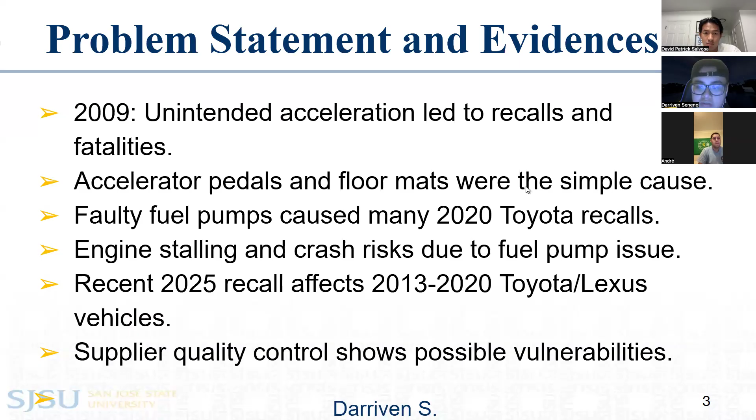As for some TQM tools that we will be using, we're going to use the Pareto chart, benchmarking, QFD, the cause and effect diagram, and control charts.

After we conduct our Pareto analysis, the most critical issue is power window switch fires, which impacts 47.3%, or 4 million vehicles, and poses a significant fire risk.

Battery tray issues affect 23.7%, or 2 million RAV4 models, and those can cause electrical shorts. Fuel pump defects impact 21.3%, nearly 1.8 million vehicles, leading to engine stalling.

Toyota should prioritize a complete redesign for power window switches, use more durable materials for battery trays, and tighten fuel pump supplier controls with increased testing.

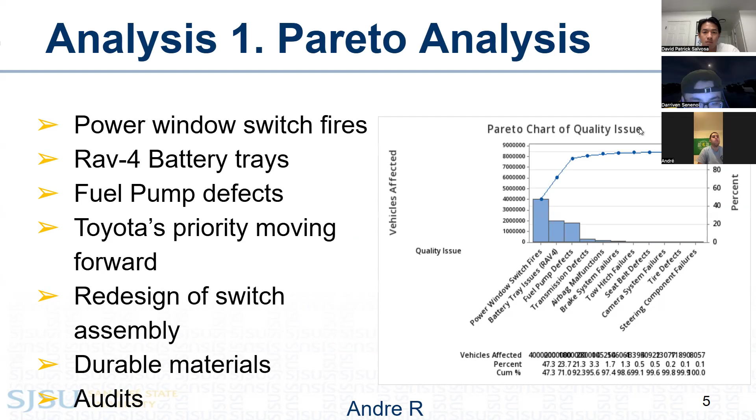Comprehensive supplier audits and rigorous in-house testing are needed for airbags and brakes, and addressing these main issues is crucial for safety and quality.

Toyota utilizes benchmarking to address recent quality concerns highlighted by a 2024 certification scandal. Process benchmarking against Honda aims to strengthen testing and reduce over-reliance on automation, reinforcing their lean principles.

Financial benchmarking against Tesla seeks to identify hidden quality costs and improve supplier oversight despite record 2025 revenues. Performance benchmarking against Lexus targets improved customer satisfaction and in-car tech reliability after a decline in the JD Power IQS.

Product benchmarking against Subaru focuses on enhancing durability and reducing recalls related to issues like power window switches and transmission failures, by analyzing competitor strategies and strengthening testing.

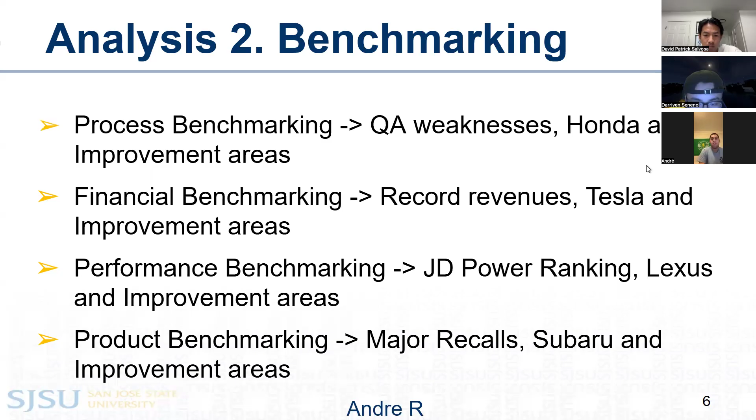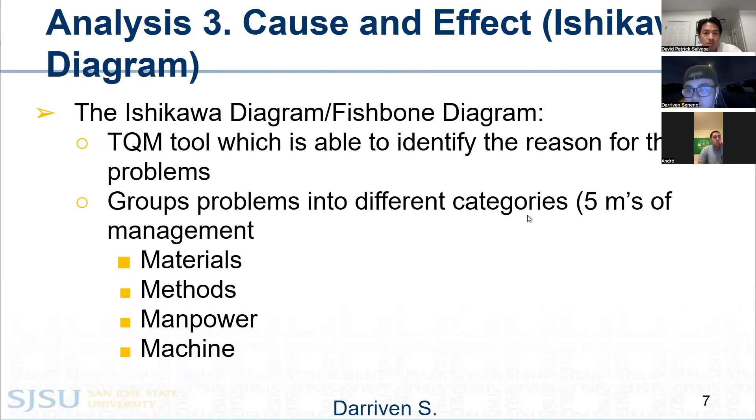Another TQM tool we used was the cause and effect, or Ishikawa diagram, also known as the fishbone diagram. This is used to organize potential root causes of these issues. This tool also helps us identify what might be contributing to the defects and groups them into four key categories: materials, methods, manpower, and machines, which are part of the five M's of management in lean manufacturing.

Our fishbone diagram has four main causes: manpower, machine, method, and materials, with short sub-causes included. For manpower, we have inadequate response times, leadership communications, training, and supply monitoring.

As for machines, we have outdated systems, inconsistent testing equipment, defective machinery parts, and error detection on automation. For methods, we have delayed recalls, risk checks, verification on fixes, poor communication, and no customer data in identifying issues.

As for our last cause, materials, it consists of supplier issues, low quality materials, part durability, and untested material consistencies. And these all lead to the quality problem of defective products, which results in recalls and crashes.

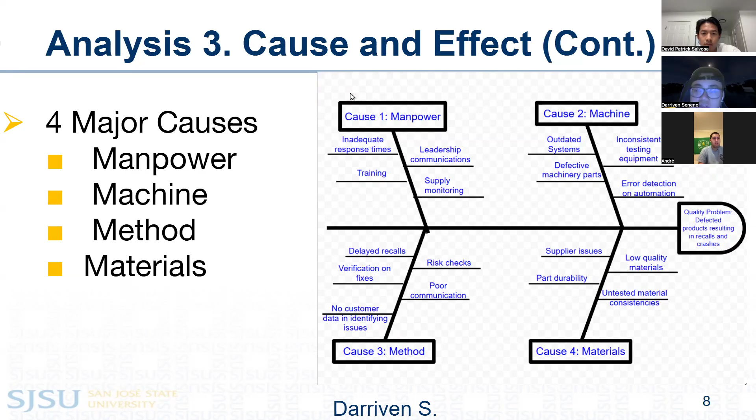For our control chart, we built a C chart to track how many Toyota fuel pump recalls happen each month in 2024. We pulled the raw numbers straight from the NHTSA's public recall database, put one month per row, and pasted the 12 counts into Minitab, because each month is the same opportunity. A C chart was the right tool.

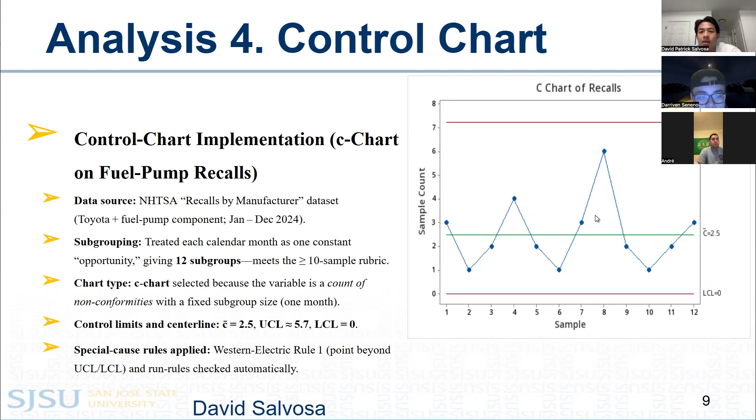Minitab calculated the average count at 2.5 and set the upper control limit at about 5.7.

Next slide. Eleven months sat safely inside those limits, but August showed 6 recalls and jumped over the line. That's a special cause signal. What that means is that the recall process is mostly stable, yet August tells us a supplier or quality assurance slip happened and needs a fix. Going forward, any new point above that limit will warn us long before a big recall snowballs.

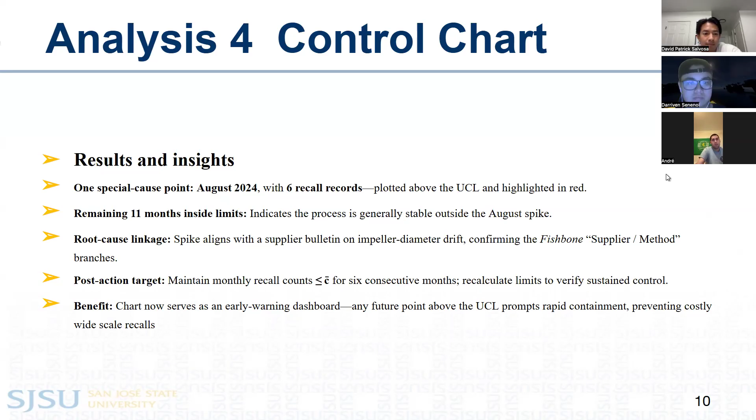I developed a QFD, a quality function deployment model, and I gathered data through a Qualtrics survey, which asked participants their most recent vehicle brand, ranging from Hyundai, Honda, Subaru, Ford, and an option for other car manufacturers. Then I had two questions with a scale rating of 1 to 5 on six key attributes: safety, reliability, recall notification, build quality, durability, and transparency.

These questions covered their own vehicles, and then what they would like in a vehicle they would purchase in the future. I also added an option for open-ended feedback on strengths and improvement areas for Toyota or any other companies.

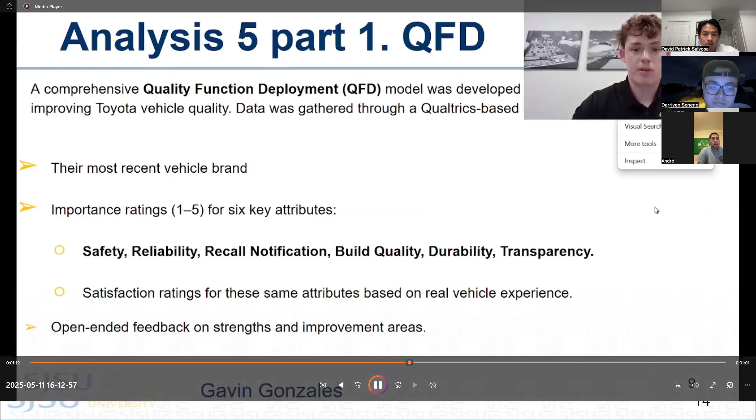The QFD outcomes we found were top customer priorities — obviously all the importance properties, functional requirements mapped. Technical areas like safety audit, supplier QC, automation, and assembly were evaluated for their impact on meeting customer needs.

We had competitive insights: Toyota actually performed well, but lagged in real-time recall and assembly automation compared to their number one competitor, Honda. Calculated priorities like safety audits and supplier QC had the highest absolute and relative weights, indicating key areas where investment will yield the most customer value.

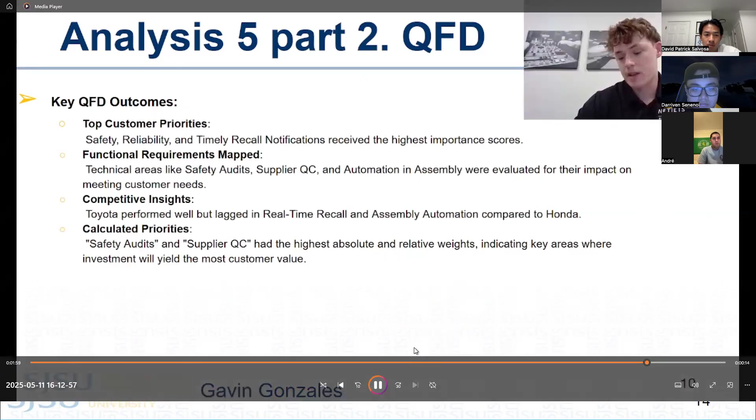And this is all displayed on the QFD that was developed over this research process.

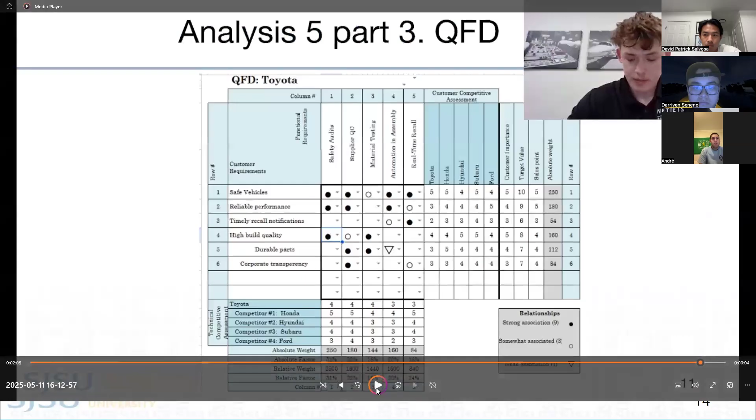For our action plans, our first action plan is the power window switch redesign. Our first action targets the window switch fires, the biggest slice of our Pareto chart. It's rated high feasibility because it's low risk, quick payback, and the changes are totally under Toyota's control.

Our second action plan is the fuel pump supplier capability upgrade. The C chart spike in August points straight at the fuel pump supplier. Most of the costs sit with the supplier, and Toyota's contract lets it charge back for defects, so the supplier has an incentive to cooperate.

Success is simple: keep monthly recalls under the 2.5 average for 6 months straight. The mix of quick containment and shared costs makes the plan very doable, so it's high to moderate feasibility, mainly depending on supplier follow-through.

Our third action plan tackles battery tray failures, the second biggest issue. We'll switch the stamped steel tray to a glass-filled polypropylene composite. Composite trays are already used by competitors, so the tech is proven, but we'll need new tooling and crash tests.

Costs even out because the composite resists corrosion and cuts future warranty claims, though it needs more tooling, cross-team coordination, and time. We grade this one as moderate feasibility, but the expected 75% cut in warranty claims justifies the effort.

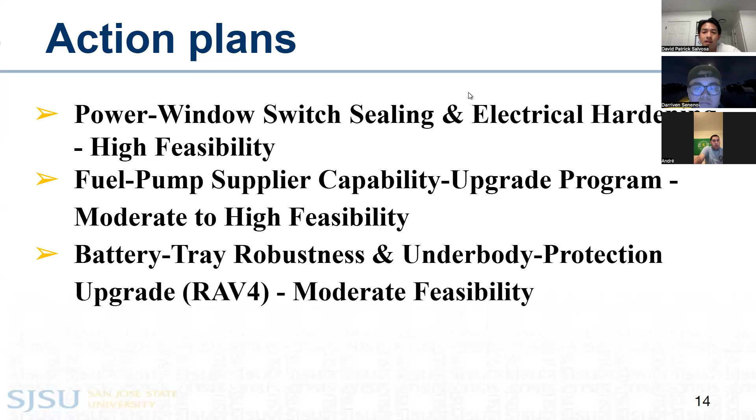To conclude, we found that power window fires, fuel pump defects, and battery tray failures were the main quality issues. Using TQM tools like Pareto analysis, fishbone diagrams, benchmarking, and control charts, we were able to identify the root causes and then develop the action plans.

The action plans, as stated earlier, are: redesign the power window switch, upgrade supplier process control for fuel pumps, and improve the battery tray design, which can help lead to real improvements. And here are our references.